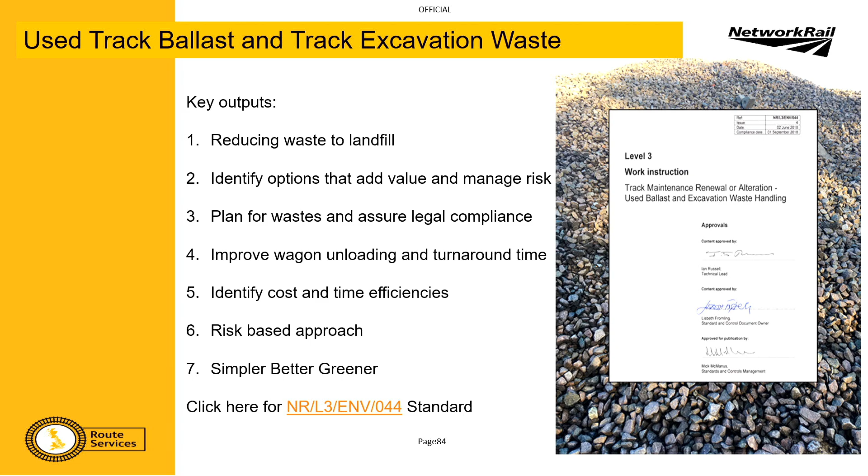So starting with our standards and saying this is the blanket approach, but then getting into the details of what you're looking to deliver and looking for how do we manage it on a risk-based approach to achieve those efficiencies. And ultimately, therefore, delivering simpler, better, greener in a really tangible way.

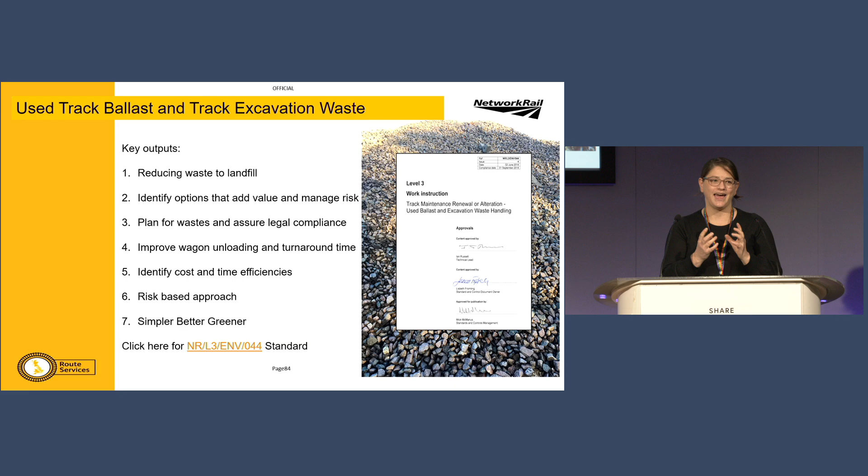So this is the standard that covers this particular bit of work. It's the 044 standard. And Eric and myself and Emily from Technical Authority are currently going through the process of refreshing this standard, so there will be a new version coming out. And we're looking to make improvements to make it easier to follow, more efficient to use, and ultimately, having networked a bit and met Darren from SEO, link it into the Track 8100 standard. So if we can start to manage our waste better and get that asset that is still in that track waste out of it, we can feed that into a blended ballast recycled product that can go back into the track, and we truly create that circular economy.

And as I've just mentioned to Gareth, TIU are one of the first who are going to be using that product. So we're very excited to see that, and obviously the carbon reductions that come with that, but also the reduction in us losing that good quality aggregate out into secondary aggregate markets and instead retaining that asset within Network Rail.

So the standard itself, and I promise this is my most wordy slide, sets out a process to be followed to identify what waste is there and whether it is hazardous or non-hazardous. It starts off with a risk assessment, and if there is a risk, then the trackbed team will be able to organise to undertake sampling, have lab analysis done, and then there's a process that I support there to actually classify the waste.

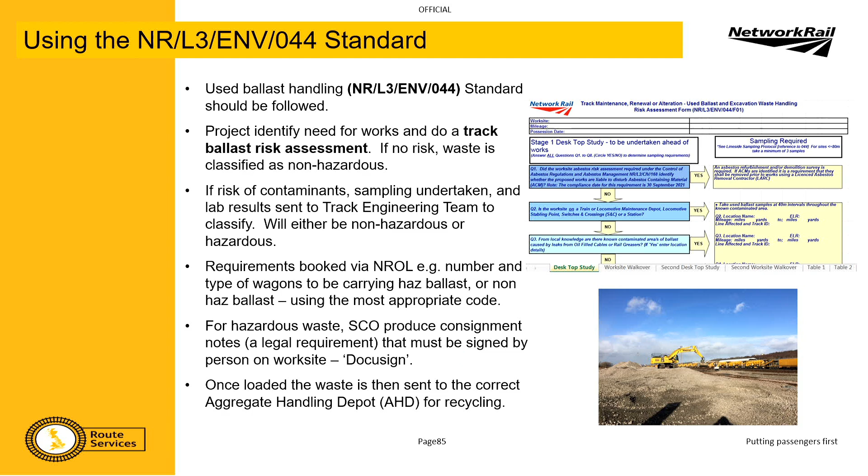And it gives it a waste classification that is then booked onto NROL with the number and type of wagons that are going to be carrying hazardous waste or non-hazardous, and the appropriate commodity code that goes with that. And then if it's hazardous, SEO produce a consignment note for it as well.

We've introduced DocuSign so that it's a much more efficient electronic version rather than the days of paper copies, which we definitely never used to get back. They never used to make it from whichever train driver took the train out of the work site all the way back to our site. So it's been a real benefit to introduce the electronic DocuSign.

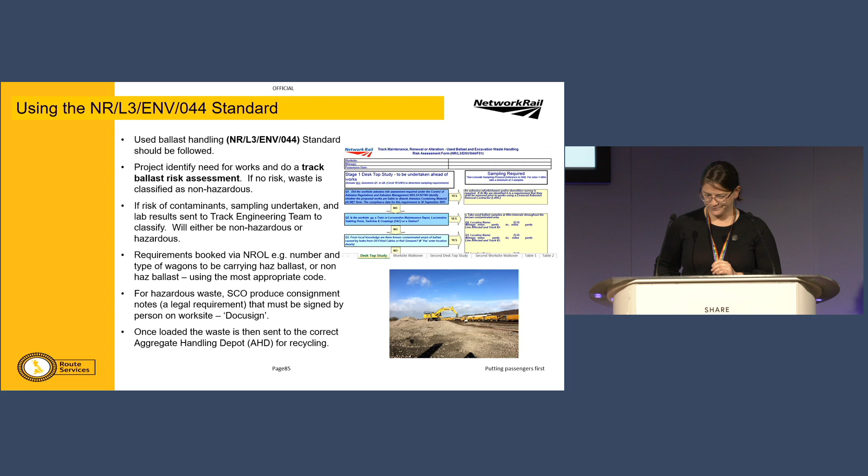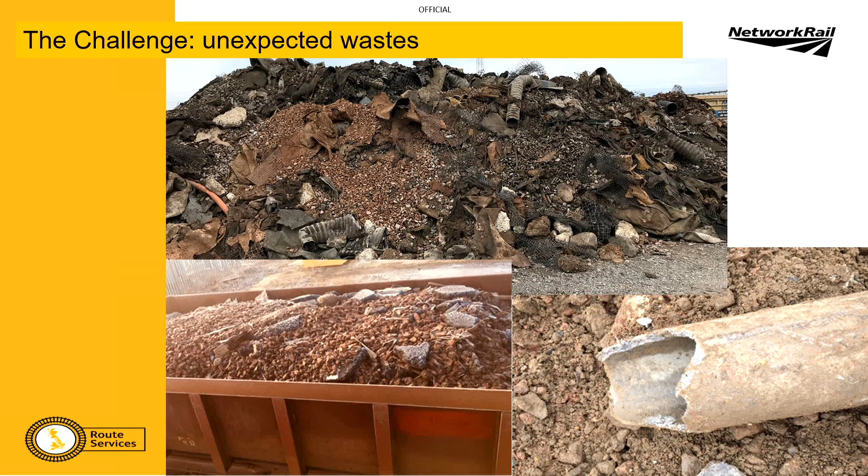And once the waste has been loaded into the engineering train, then it's sent to the correct aggregate handling depot for recycling, and we're able to process that waste. That's how it's supposed to go. This is what we actually get. And as you might imagine, it's not just used track ballast. So the challenge for us is dealing with those unexpected wastes.

And it can be anything from terram, bits of drainage piping, to a lovely bit of tarmac, and everybody's favourite, asbestos-containing material. That is a big challenge for us in SEO, to manage that waste and make sure that we can keep those wagons being unloaded and turned back around, and that we manage that waste out and try to avoid landfill. But it's also a problem for the people who are delivering that work, because it costs, and it costs big. So I've started back with the 2019-20 figures, because that's when we really started to unpick this.

So myself and a number of colleagues across SEO, from the SEO waste team, the SEO supply chain services team, really started to look at the spend. And we realised that actually, not only were we having this risk of unexpected waste that we were having to manage, but we were also having these high costs. And that all starts way back at the design and planning stage.

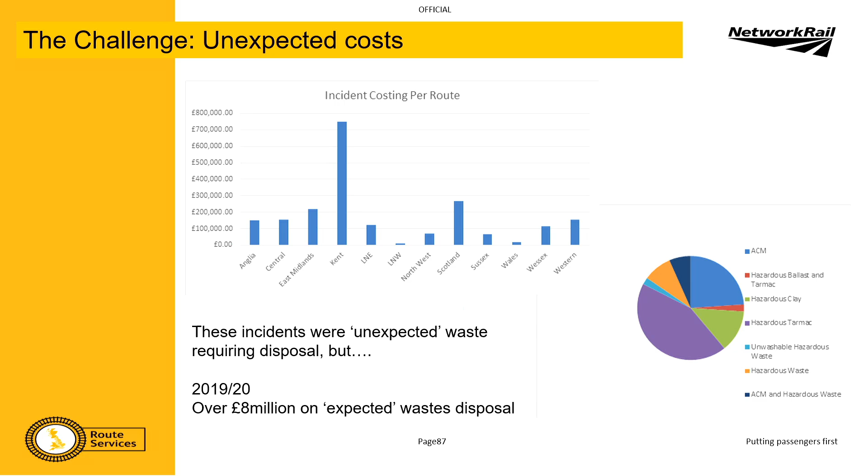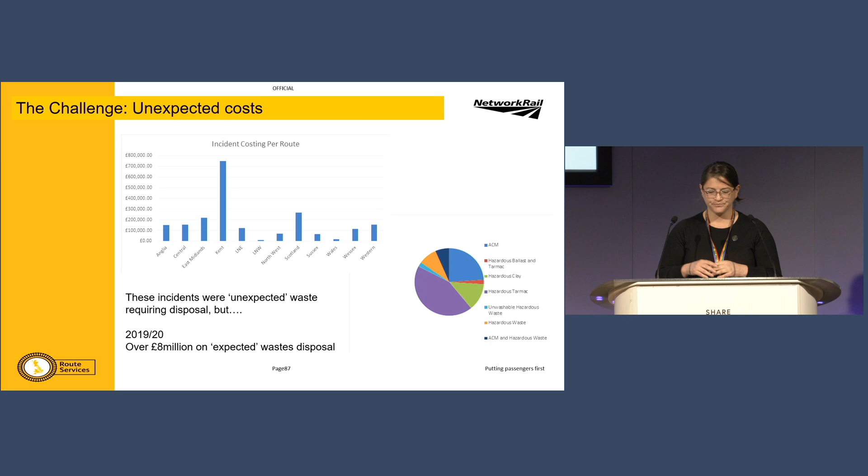So it's absolutely what everyone's been talking about, is that we have to look at this from a systematic point of view. There's a standard, the ENV 015 standard, that says that every capital delivery project needs to do a designing out waste workshop or a sustainability design workshop. That's the point that these decisions should be being made. But in reality, what mostly happens is they go, oh, well, it's track excavation waste, that'll go in the SEO wagons, that's off, so we'll focus on the other wastes. And that's where we can really help as SEO.

So we are the specialists in following the 044 standard that is linked to this track excavation waste. But we're also waste specialists, and so we can help at looking at those problem wastes, the asbestos-containing material, the track waste that's got asbestos fibres in, invasive species, tarmac, you name it, we can have that conversation, and we can develop good options for waste management based on site specifics. So developing that risk-based approach. And again, something that we've been doing on TIU around invasive species that has reduced significantly the amount of track waste that would be going to landfill.

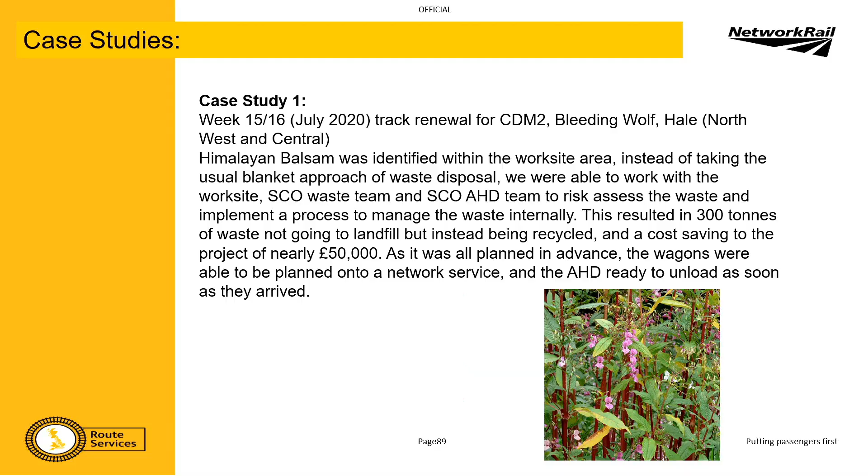So I'm going to run through just a few case studies just to give you an example of the kind of things that we can do. These are based on real projects that have happened. So, for example, this one we had at Bleeding Wolf at Hale, Himalayan balsam, and it was identified within the worksite area, and there's normally a standard exclusion zone, that anything within that area, if you're digging it out, it gets landfilled as being contaminated with an invasive species. However, we were able to take this risk-based approach and identify that actually Himalayan balsam, as it goes, is pretty weedy for an invasive plant, and the seeds that it produces don't survive our processes.

So we were able to reduce down the amount of tonnage that was going to end up being disposed of, and that had a cost saving. So it had already been budgeted that this waste was going to have to be disposed of, and so this was an actual cost saving on that. It was all planned in advance. We knew those wagons were coming. We therefore had all our setup ready to go, and so there was no issues with the logistics. Turnaround time was just as quick as it would have been if we hadn't done that additional work.

Second one, Japanese knotweed, bit more of a tough one. And this one, again, re-signalling at Trafford Park, had already identified the dig area and that they had Japanese knotweed within that. And actually by working with the project, they were able to go back and look at the design and challenge, did they really need to dig out that exact footprint? And they were able to make a change to their design that therefore meant they got less waste that needed to be handled and needed to be disposed of.

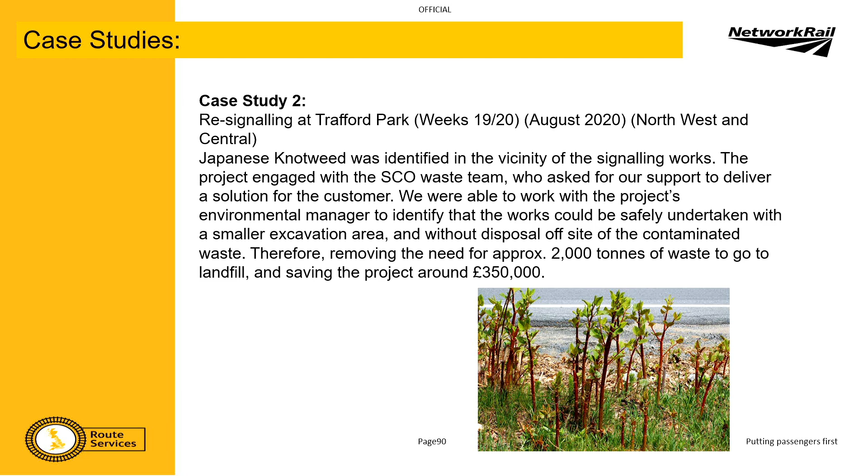And we were able to save 2,000 tonnes from going to landfill, save the project around about 350,000 that, again, they had already budgeted for because they knew they had the Japanese knotweed. So by putting that risk-based approach in, we achieved that cost saving.

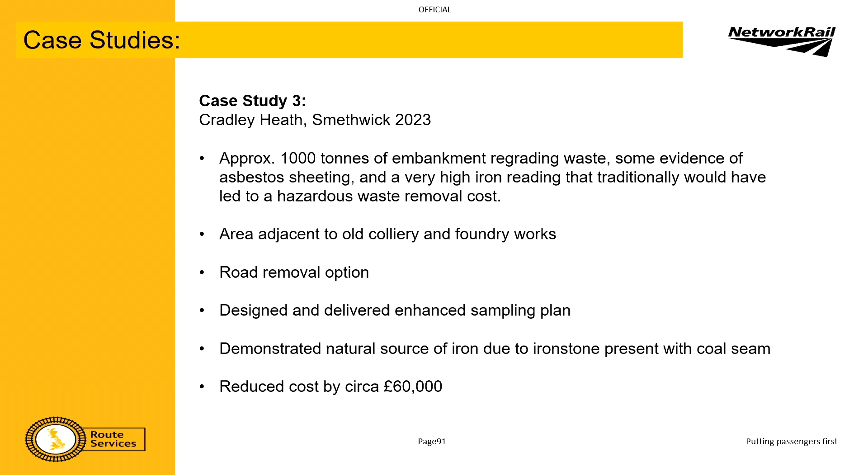Cradley Heath, Smethwick, this is a particular favourite of mine. This was a works delivery job. So what I'd class as my off-track work, where anything and everything is buried on the sides of the railway. And this particular job was a regrading of an embankment that was facing away from the railway for a housing development. And there was evidence of asbestos sheeting there.

Interestingly, when I looked on Google Maps Street View, the building that had been knocked down prior to the housing development had an asbestos roof. I'm just suggesting we might know where that came from. So we had to have the asbestos sheeting removed, which was fine. We organised for our framework supplier through SCO to come along. They're a licensed asbestos removal contractor, remove the asbestos sheeting.

But then in the ground sampling that was done, there was a really high iron reading identified that was going to mean that all of the waste would have to go as hazardous waste. However, the area was next to an old colliery and a foundry works. And by looking at it, talking to the project, I worked with them to design and deliver an enhanced sampling plan.

We used the track bed investigation team, the framework supply that they have, to be able to take those samples and have them analysed. And what I was able to demonstrate is that actually that iron was naturally occurring. And so there was no need to dispose of it as hazardous. So we were able to use our technical knowledge to support that team in delivering and save them around 60,000 on a fairly straightforward works delivery job.

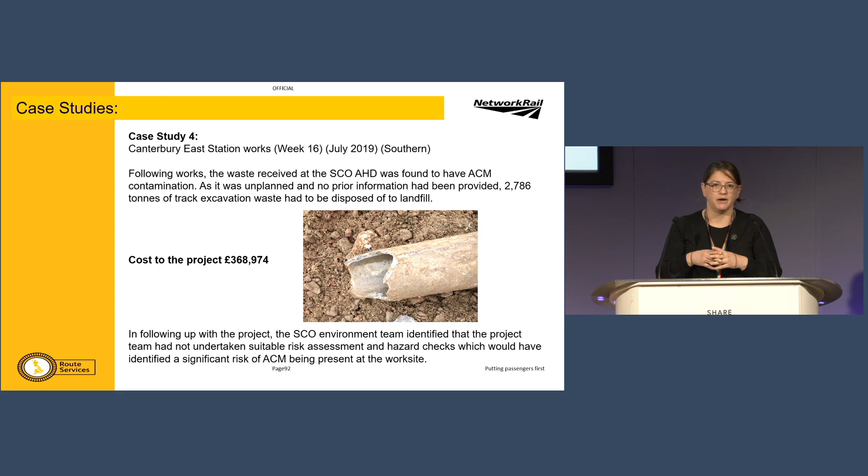This is where I liken it to, if you book a plumber to come and service your boiler, and it's a weekday and you've booked it a couple of months in advance, they come along with the kit that they're expecting to use to do that service, and they charge you the fair rate, and it's all fine and good.

If, however, you ring that same plumber at 3 a.m. on a Saturday morning for an emergency call out, you don't know what's wrong, so they show up but they haven't got the right kit or they haven't got the parts they need, so they've got to go off and get them and come back. It's all possible, it's all delivered, but you pay 3, 4 times the price that you would from your weekday planned-in service.

And it's the same in waste. We can take whatever you send us and we can manage it. If we know about it and can plan for it, it will be at the lowest cost. If it happens unplanned, we kick into emergency procedures and we start to see that cost rising. When I followed up with the project, there were actually some points at which, during the risk assessment process, it should have been identified that there was a risk that that asbestos-containing material was there.

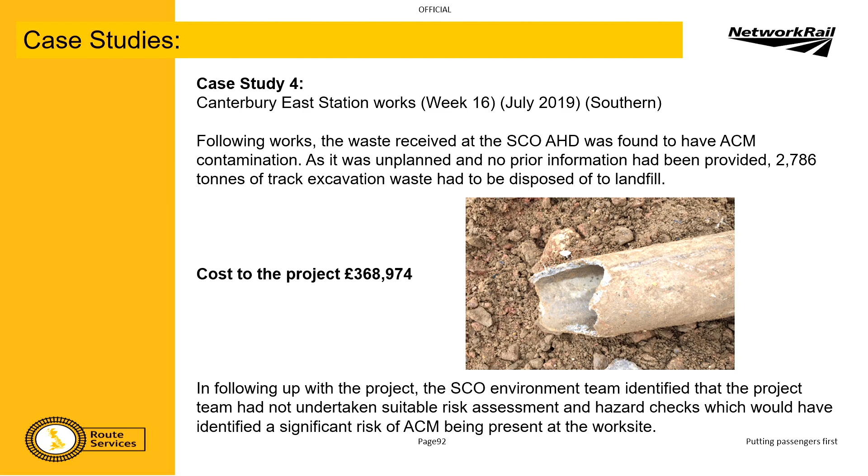And so what I'm doing at the moment is pushing back and getting projects to look again at buried services plans, at track bed investigation documents, all of which come through SCO and provide fantastic amounts of information. They are so worth spending time and money on up front, because what you might see in spending 3 to 5 grand more on a slightly more involved track bed investigation, you will see that at least cost avoid you 10 times, but usually 100 times, because we usually deal in sets of wagons. 20 wagons, 1,200 tonnes, gives you that usual 350k.

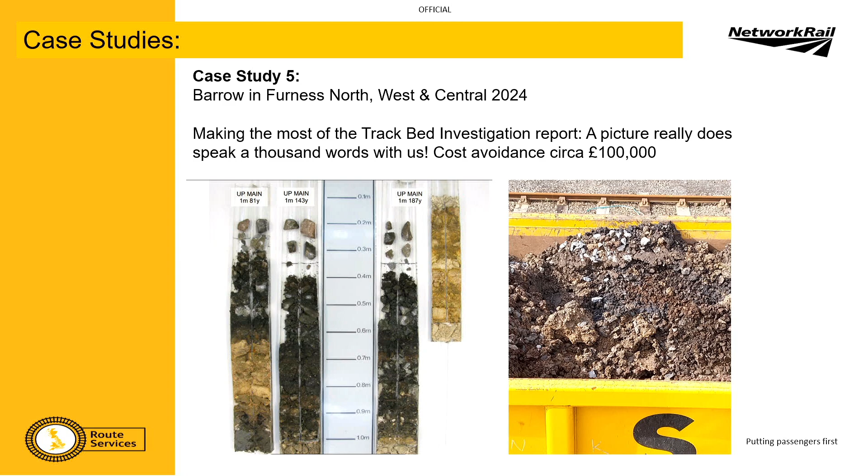I was able to go to the project and say, "Please give me the TBI." I looked into the TBI and I was like, okay, I can see it's not actually oil, that's actually organic matter, which again, it's made up of carbons, it breaks down in the same way, so it does produce that black content, it does produce a smell, but it doesn't make it hazardous. And so we were able to say, okay, we can deal with that waste as non-hazardous, and that created a cost avoidance. So the project had never planned on having hazardous waste, but if we'd have dealt with it as that because we suspected it was oil, it would have cost them an additional 100k.

I can't emphasize enough the power of the information that is already in your hands. You will have already got that information through going through the various stages of design and planning. And it's about following that through and bringing it to SCO and saying, right, I've got this waste, how can you help me? And you don't need to be an experienced waste manager or know anything really about waste to have that conversation. You only need to be able to say, does it look like track ballast or does it look like something else? If it looks like something else, like this, come and have a conversation with us and we'll make that plan. So if you're doing a plain line track renewal and you're only digging to about 250 mil and it's not that degraded, it's probably going to look like track ballast and you'll be fine.

If it goes deeper or it's more complex or you're going anywhere outside of the standard 4-foot track layout, so you might be digging some cess, line side, bit of old platform, even the pathway that goes down the side that the signaller uses that might have tarmac in it, then those are the times to come and talk to us, because we really can connect these dots then, and we can on the ground deliver services that achieve you efficiency, cost avoidance or cost saving, but they also contribute to those carbon targets, circular economy targets, your waste targets for reducing and recycling.